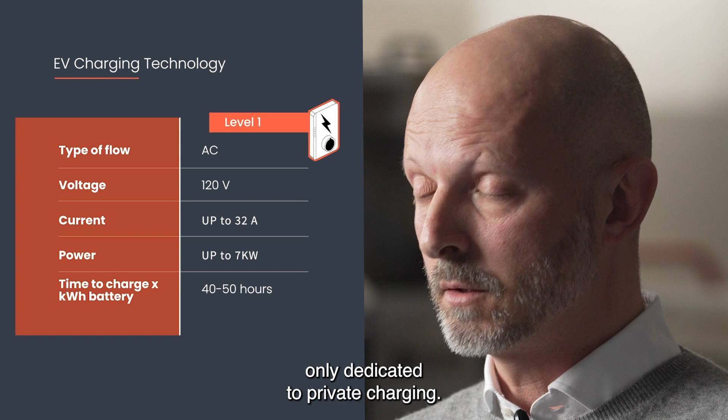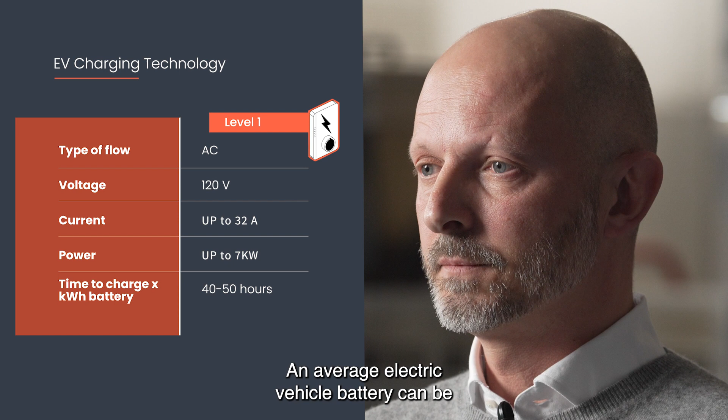One way to classify the technologies is the level of charging. Nowadays, there are three main levels of electric vehicle conductive charging. The higher the level, the faster the charging, as more power is delivered into the vehicle. Level 1 is the slowest, only dedicated to private charging. It charges through the residential AC 120 volt outlet. An average electric vehicle battery can be recharged in 40 to 50 hours, while a plug-in hybrid vehicle can take 5 to 6 hours.

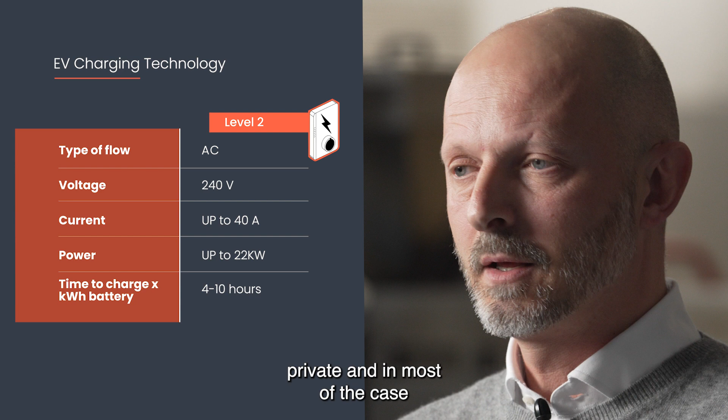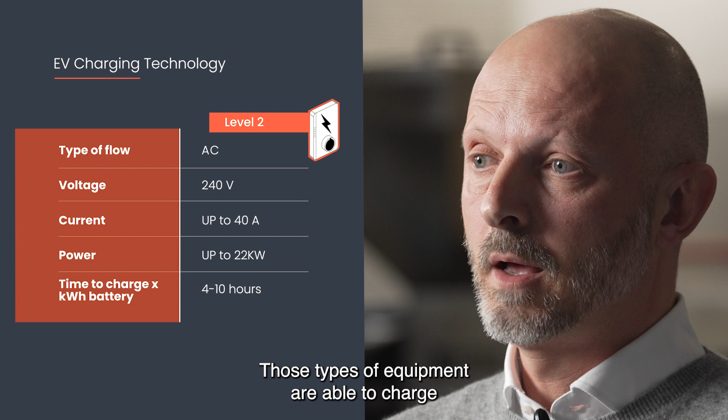Level 2. Those stations charge up to 240 volt, with some private and, in most cases, public infrastructure, like restaurants, shopping centers, and workplaces. Those types of equipment are able to charge an electric vehicle in 4 to 10 hours, while a plug-in hybrid vehicle can take 1 to 2 hours. Both level 1 and level 2 are limited by the onboard charging power capability of the vehicle.

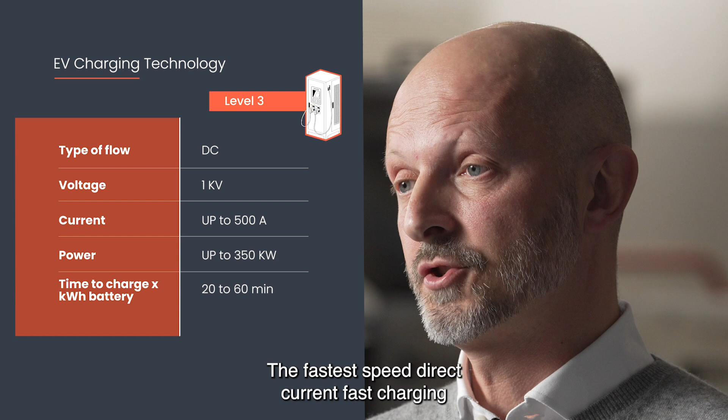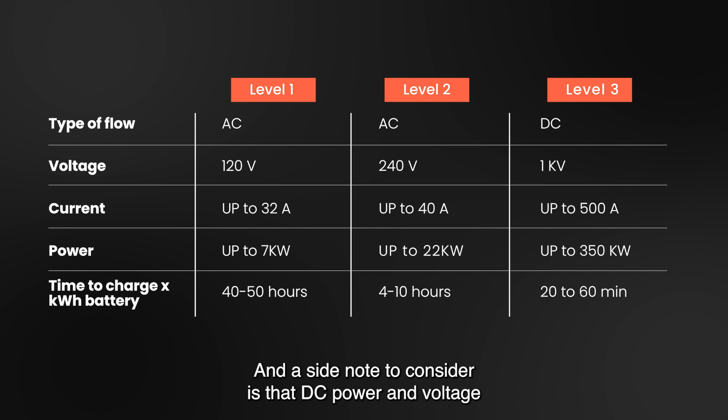The fastest speed, direct current fast charging, is mostly installed for public infrastructure, along highways and heavy traffic roads. Those equipments are able to charge an electric vehicle in 20 to 60 minutes. Most plug-in hybrid vehicles don't use direct current fast charging. And a side note to consider is that DC power and voltage represent an important challenge to the insulating material for components like cables and plugs. We have some examples of our charging cables here.

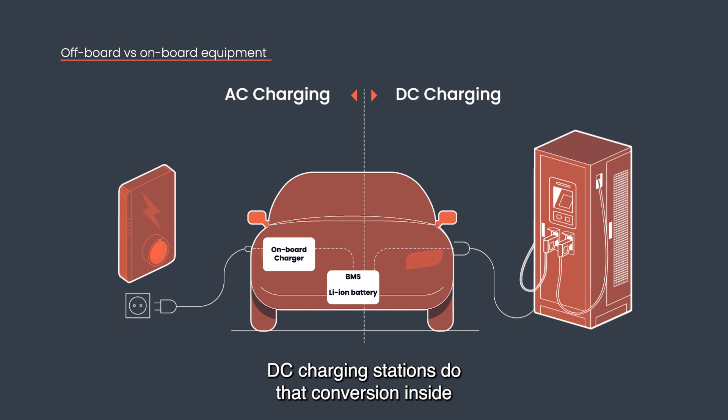Unlike AC chargers, DC charging stations do that conversion inside a converter in the charging station itself. This means it can bypass the limitations of the onboard charger in the vehicle and deliver power directly to the battery. This results in lower losses that, when combined with the ability to deliver more power directly to the battery, result in a decrease in your charging time from hours to minutes. Level 3 charging cables are larger and heavier because they deliver more power directly to the battery. You can see that the copper power cables are larger in order to be able to handle that extra current, but that extra current generates a lot of heat.

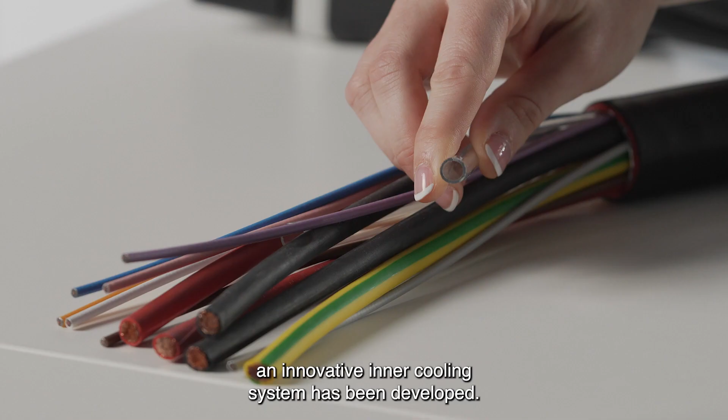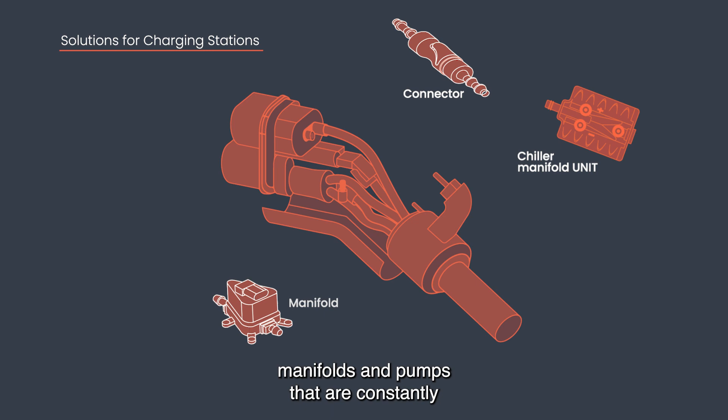So in order to maintain the cable at a reasonable temperature during charging, an innovative inner cooling system has been developed. This is the tubing, where a coolant is circulated continuously in a closed circuit and removes heat from the high voltage connector pins through a manifold system in the charging station itself. This is the reason why this cable is so much more complex. Let me now explain how we can increase the efficiency of your cooling system. Inside the cooling system, we have different components like connectors, chillers, manifolds, and pumps that are constantly stressed by mechanical, chemical, and thermal loads.

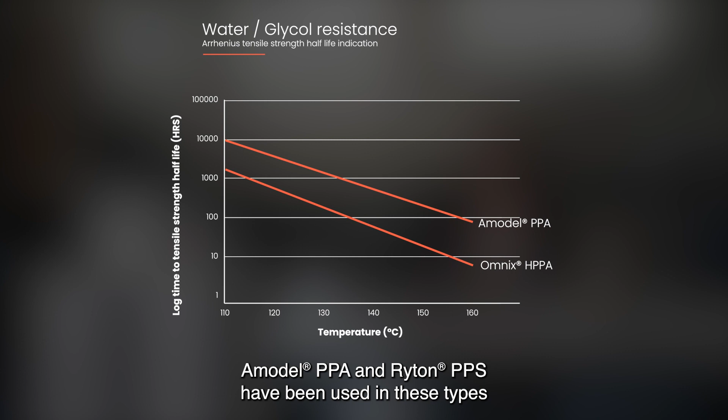Our high-performance materials, like Omnix HPPA, Amodel PPA, and Ryton PPS have been used in these types of cooling systems for decades. They can maintain the efficiency of your cooling system throughout the lifetime of the charging station. Typically, the coolant that's used is a mixture of water and glycol, but in some instances, an oil can be used to improve the efficiency of your system at higher temperatures.

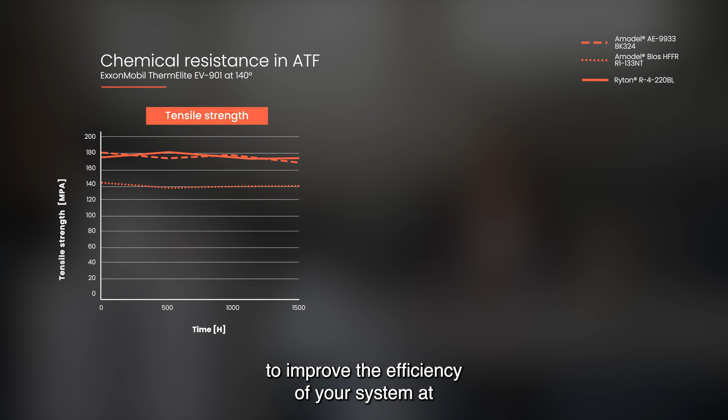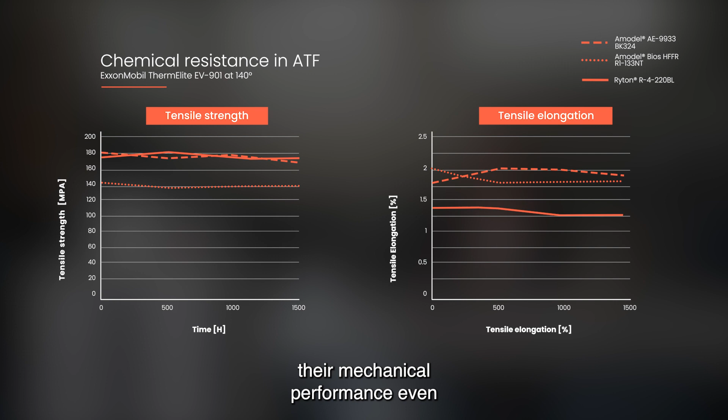The durability of your cooling system components can therefore be improved by using our materials, which maintain their mechanical performance even when in contact with aggressive chemicals and high temperatures. With our solutions, we can support the adoption of efficient cooling systems that enable faster DC charging.

In addition, we observed in the market another big factor impacting the charging network nowadays. With the increasing number of stations as a consequence of broader electric vehicle adoption, it is more and more clear that reliability is a key element affecting the market today. And that's exactly the challenge the market faces today, with one station out of 4 being out of order.

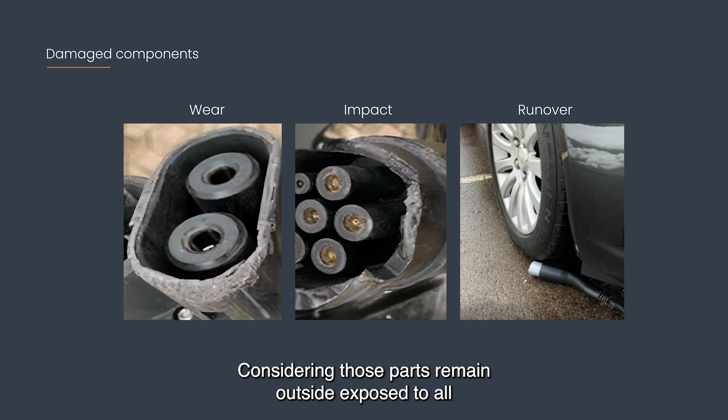The incremental stress created by higher power and voltages, combined with the need for higher safety margins, creates the perfect storm. At the moment, one of the major causes of failure is the quality of material in critical components like the charging plug and socket. Considering those parts remain outside, exposed to all weather conditions, and have to withstand wear, impact, drops, and even being accidentally run over, we really see how material can make the difference.

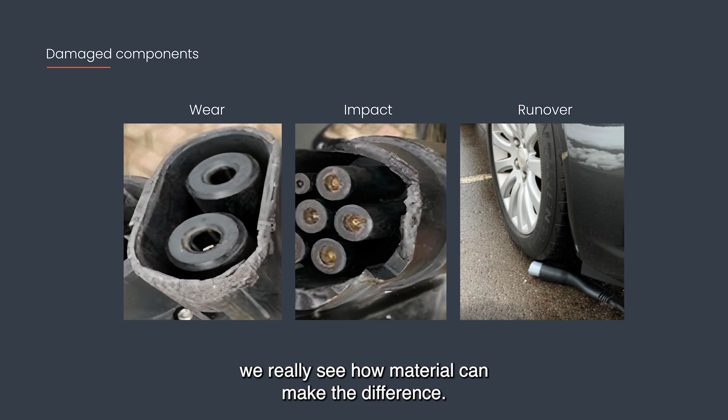So, how could the attributes of our material enhance durability and reliability? Whether building an AC charging system or a DC charging system, there are some key material properties for the charging plugs and guns that you need to keep in mind. These are dimensional stability, mechanical durability and impact resistance, safety, and electrical insulation properties. PA66 is the material that's most commonly used in these systems for the charging plugs and sockets.

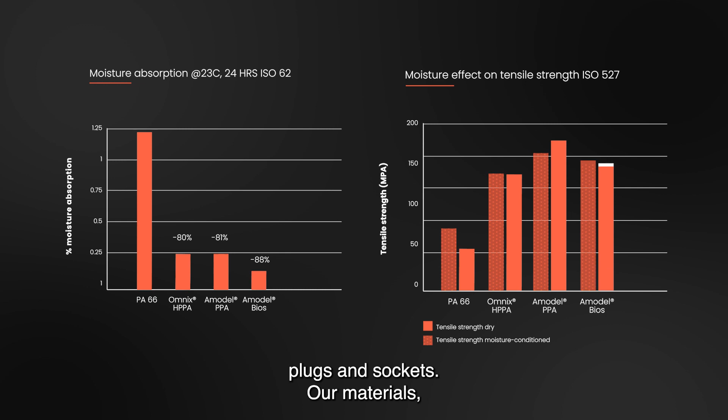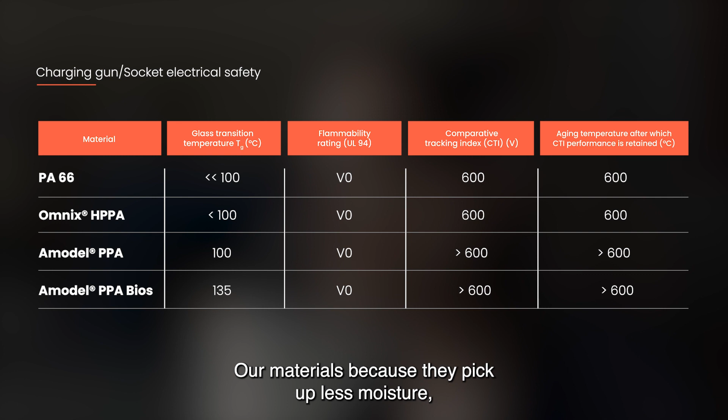Our materials, like our Omnix HPPA, Amodel PPA, and Amodel PPA BIOS, pick up significantly less moisture than PA66. That results in less warpage and parts that are more dimensionally stable when used outdoors, resulting in an increased lifetime of your charging station components. Mechanical durability and strength are also critical, as these components have to withstand the daily wear and tear of use. Our materials, because they pick up less moisture, maintain their superior mechanical performance over PA66.

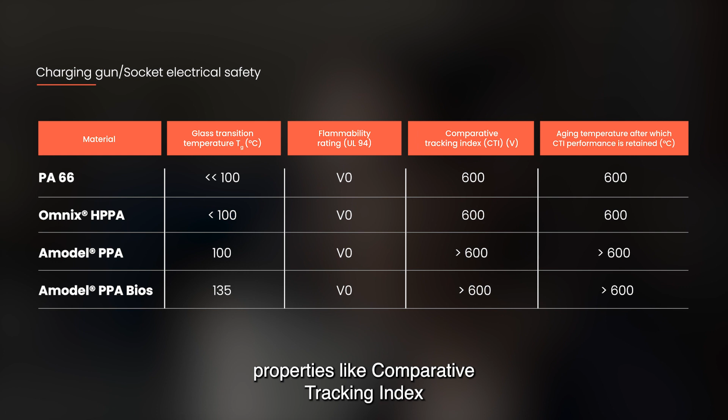Besides durability, other key requirements are electrical insulation properties like comparative tracking index, or CTI, and V0 flammability ratings. With the currents and voltages increasing from AC systems to DC systems, the retention of these properties is more critical than ever for safety and reliability.

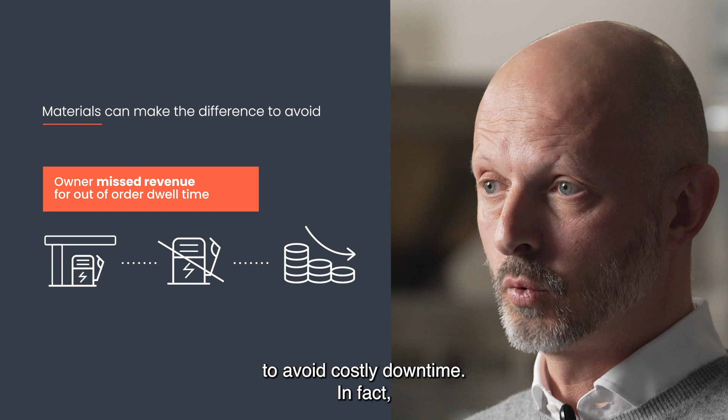Thanks, Vittoria, for the great explanation. Indeed, our solution enables benefits all along the entire value chain. Let me explain why in more depth. Charge point operators, which through different types of business models own the charging station, are looking for highly reliable materials in order to avoid costly downtime. In fact, they make money only if the charging station is operable and drivers can charge their vehicle. Otherwise, their business is impacted by the missed revenue due to the long downtime.

Considering that on average they gain $400 per day when fully operable, you can easily calculate how much they lose for the long time needed to repair the damage. On top of that, extra costs for repairing can also be avoided by using higher quality materials. All in all, we can really see the comprehensive benefit enabled by our solution in terms of total cost of ownership, which also positively reflects on the reputation of both charging point operators and charging station manufacturers.

Moreover, as we already said, one of the top barriers limiting battery electric vehicle adoption in the market is consumer skepticism, which is also driven by the fear of not being able to reach a suitable charging point when needed. Adopting more reliable materials will also influence, in the medium term, a better market perception, increasing as well the trust in buying an electric vehicle.

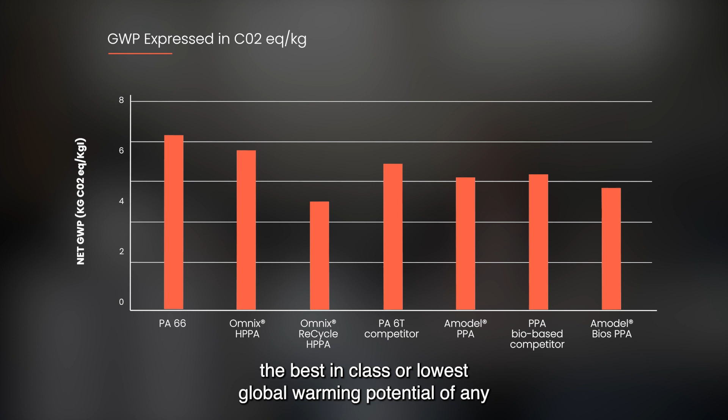Besides improving the efficiency of your system and the reliability of your charging station components, our solutions can also contribute to improved sustainability of BEV charging stations. For example, our Amodel PPA BIOS is made using bio-sourced feedstocks and 100% renewable energy in the US. This contributes to our Amodel PPA BIOS having the best-in-class or lowest global warming potential of any commercially available PPA. In addition, our Omnix ReCycle HPPA is made using 70% recycled resin and is another great solution if you're looking to increase the sustainability of your charging plugs and sockets.

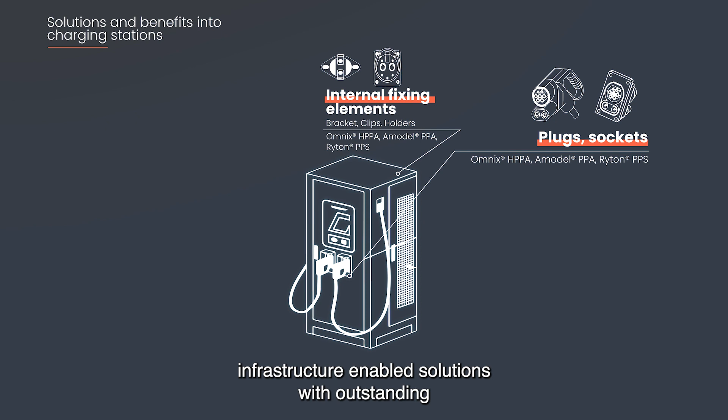In summary, the deployment of faster charging infrastructure and the need to extend the operable time requires advanced materials. Our selection of materials for electric vehicle charging infrastructure enables solutions with outstanding mechanical and electrical performance that enable higher durability of the charging network and increase the safety margin over the power range. Critical components in electric vehicle infrastructure like the charging plug, inner power electronics, and thermal management system rely on our solutions to avoid costly downtime and unsafe margins of operation.

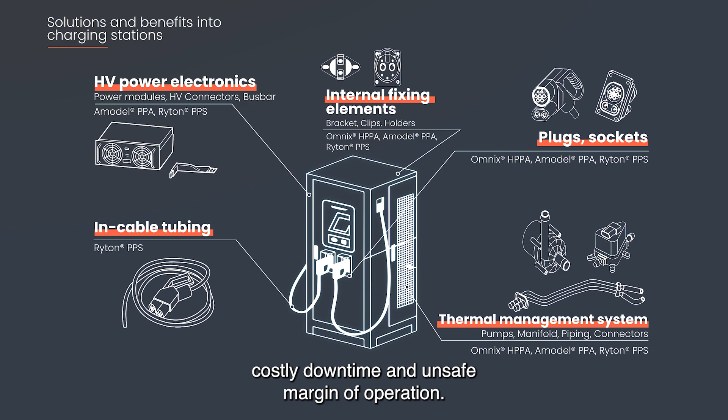And now you know how we enable cleaner, safer, and more energy-efficient mobility.